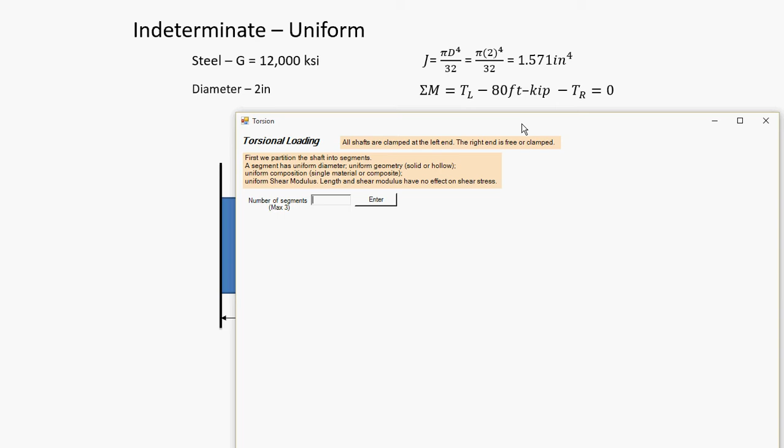So first things first, breaking it down into segments. Remember that segments consider geometry but not the load, any forces applied. So our entire shaft, it's just completely uniform geometry. So we only have one segment. The length is 100 inches total, an outer diameter of 2 inches, and a shear modulus of 12,000 KSI.

Do note that the base unit of length that I'm using in this is inches instead of feet. Inches is common to see because in some units you'll be using PSI and so on, which use inch as the basic unit. So instead of having foot-kips, foot-pounds, breaking it down into inch-pounds. Moment of inertia, I've calculated here.

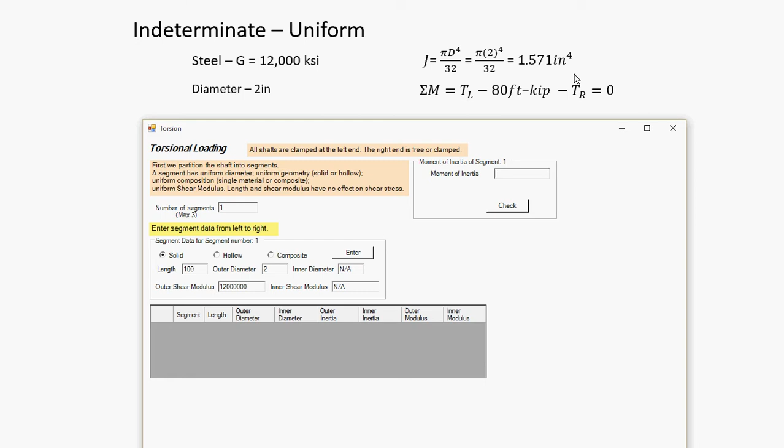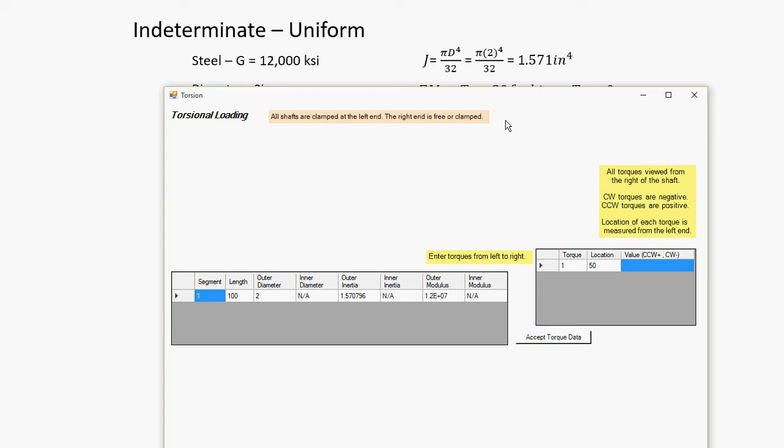Number of torques, just one. It's at 50 inches from the left, and it's counterclockwise, so it's positive. 960,000 inch-pounds. And it's clamped on both the left and right end. There is no misalignment, so you can either enter 0 or just leave it blank. One segment, two sections because of that load in the very center that's breaking it into two sections.

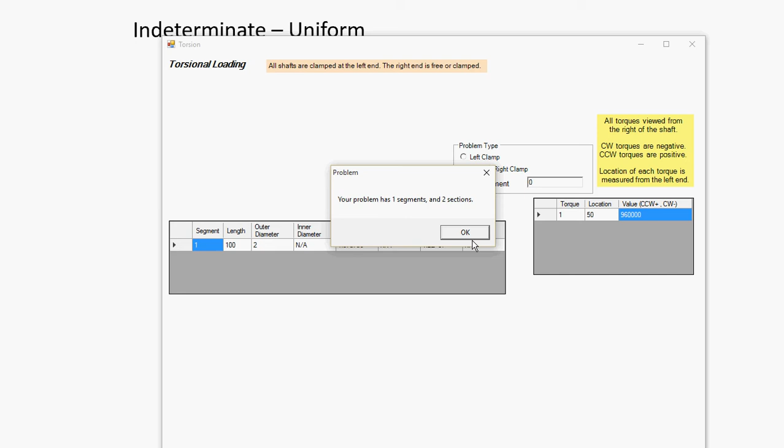Okay, so now it has it drawn, and you can see the three main steps of this process, exactly the same process when approaching axial loading indeterminate problems. First step, remove the right clamp. Now you have a determinate problem. Solve for the net twist.

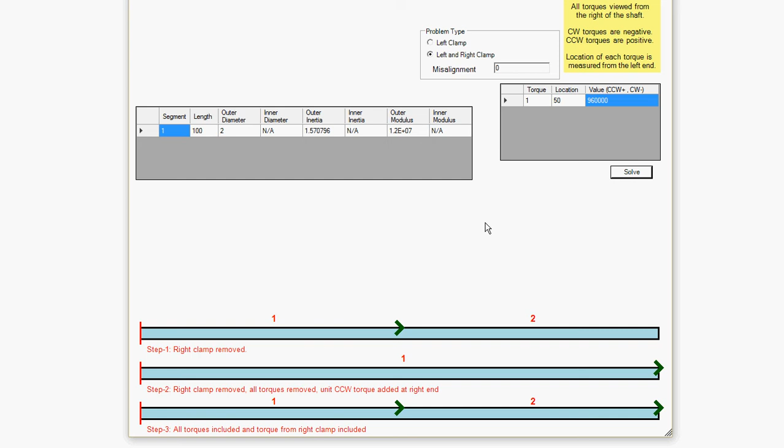Step 2, still remove that right clamp, but also remove any loads on there and apply a unit torque on the right end, and then solve for net elongation, or in this case twist because it's torsion. Once you have both of those net twists, say net twist 1 from step 1 and then net twist 2, once you have those, you can calculate what the reactionary load in the right clamp is. Once you know that, then you can solve out the problem as a determinate problem. This pop-up goes over that.

Okay, so step 1, starting from the right, working towards the left, we have over here section 2. You can see there is no reactionary clamp on the right side, so that just leaves no loads applied in section 2. Therefore, you can just put in 0. There's no amount of twist when there's no loads applied.

Then, analyzing section 1, you can see that I have calculated here stress and strain, but we can ignore those. I also have them calculated in step 2, but you can ignore those. We're just looking straight to go for what is the twist, which in this case, from that 80 foot-kip, comes out to 2.546 radians.

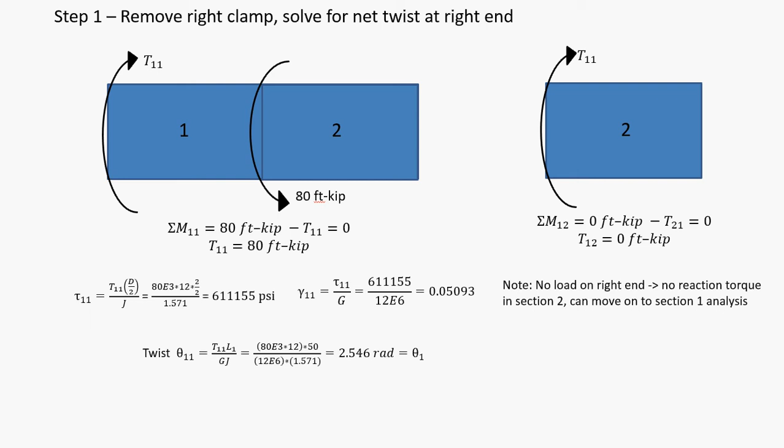Okay, so that's step 1. Now I can move on to step 2. Do note that it asks for you to just put in the net twist of the entire segment, unlike problem 1. And due to this problem being completely symmetrical with the load applied at the very center, that means that section 1 and 2 are of equal length. So the net twist in either section is going to be the same.

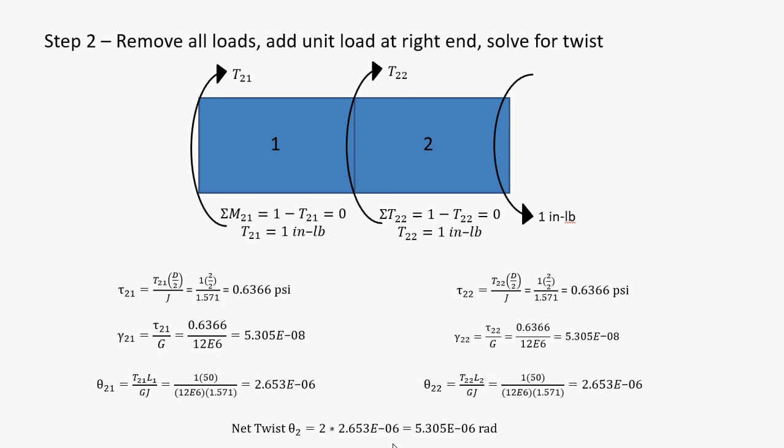So on the right here we have the analysis for section 2. We can really ignore these stresses and strains, but do note that they are the same in both sections. And then we come down to our twist, and you're more or less doubling it. And that twist is very small, but remember it's just a unit load.

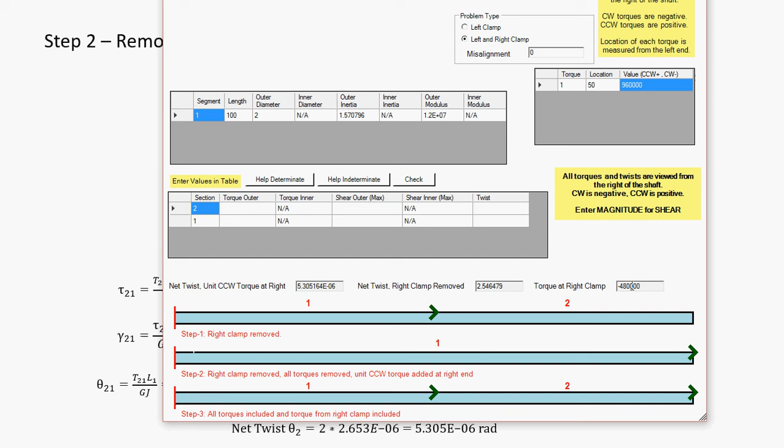Okay, so now that we have section 1 and 2 done, and it lists here what the net twist is, the program automatically calculates what the torque at the right clamp is. And I'll show you how that's calculated. So in my PowerPoint I call it step 3, but the program ignores that step. So anyway, it's with this equation here. It's the negative of net twist 1 over net twist 2. And that comes out in inch-pounds of what the right clamp is.

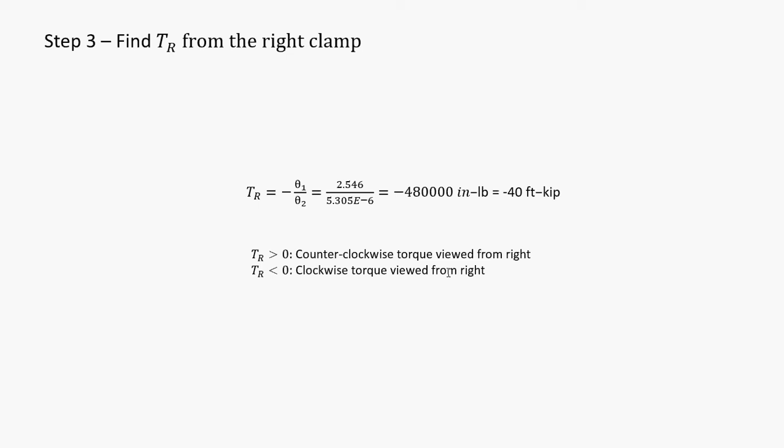Even though, strictly speaking, that equation would be a unitless answer, we know that this is giving us that torque. And it follows standard sign convention, so this one comes out to be negative, which means that the reaction in the right clamp is going to be in the clockwise direction, which also fits what it should intuitively be, both of these clamps resisting that counterclockwise torque in the center. Both of them should be in the clockwise motion.

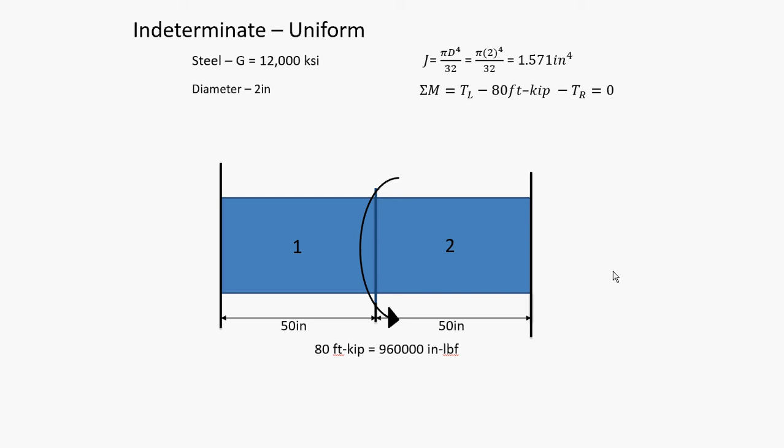So we can move on to our final step, where we solve through the entire problem with that torque from the right clamp applied. So starting with section 2, see I have my summation of moments, stress, strain, and net twist. And now it's actually asking for those stress and strains. So the outer torque, let's see, inch-pounds. Outer shear, it's really just the shear, let's see. Okay, and the twist, the program doesn't ask for strain, but I have it calculated anyway.

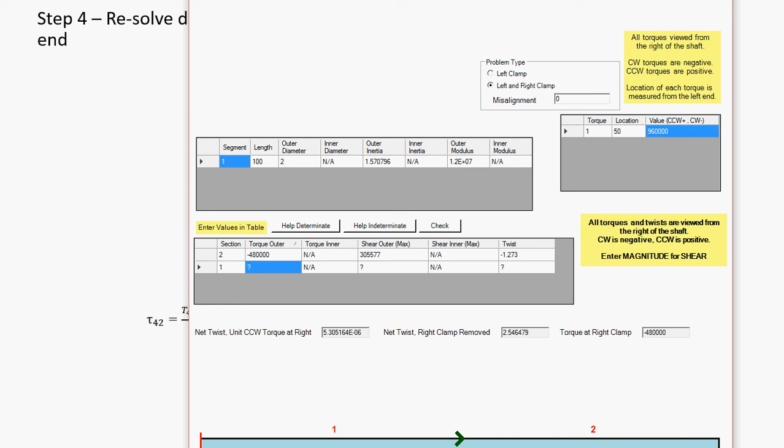Do note that for the shear, it's asking for the magnitude of the shear. So even though this is coming out as a negative, we're just looking for the magnitude. Those are all accepted, and we can move on to analyzing section 1. Okay, so here's section 1. Now we have our summation of moments, and do notice that all of these values are coming out the same as in section 2. It's due to this problem being completely symmetrical.

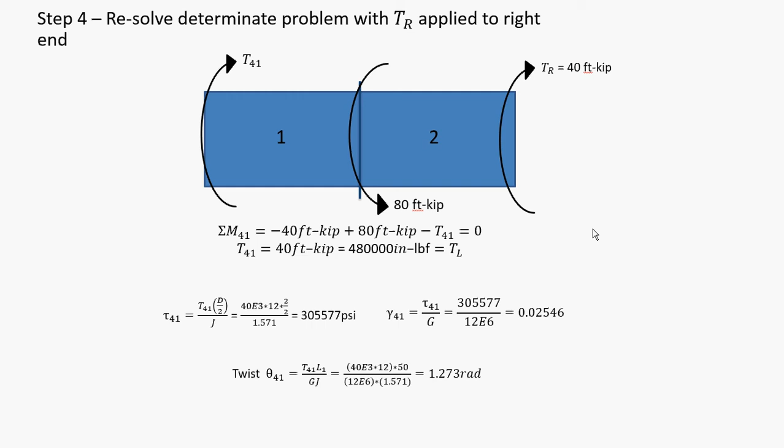That means the torque in the left clamp that you can find from the summation of moments is the exact same as the torque in the right clamp, just completely symmetrical. However, the signs are reversed in this one. So let's put those in. Solution complete. And you can see the net twist overall at the right end is going to be 0, which it has to be because the right end is clamped. It cannot move. So we know that it's working out.

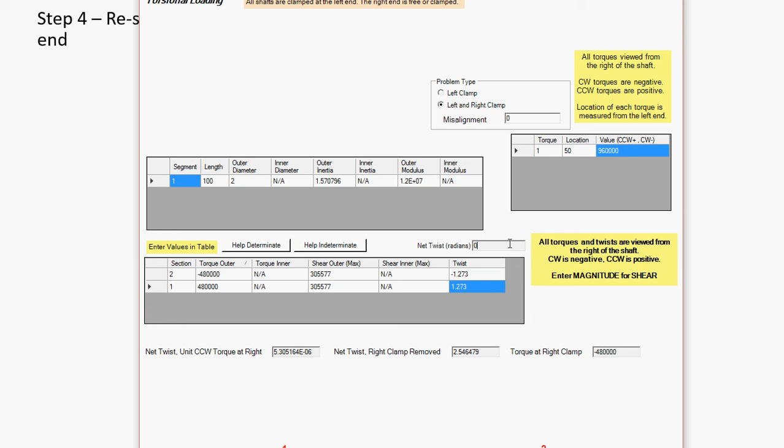If that net twist at the end was coming out to a very, very small value, then you just have some error in your rounding, which is acceptable. But if you have an appreciable amount of net twist at the end, that can't be right because it has to have 0 net twist. So that's basically that. That's the 3 or 4 step approach for a very basic indeterminate torsion problem. It's really very similar, almost exactly the same as an axial loading problem.